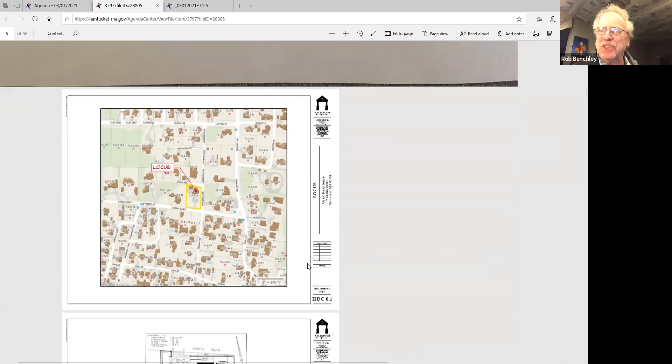And did I see Steve was here? Yes, good morning, Mr. Chair. I am available if anyone has any questions or would like an overview. Thank you. Okay, thank you. Steve, why don't you just do a quick overview? I think most of us have looked at this already, but we'd love to hear what you have to say. Okay, great. Thank you, Rob.

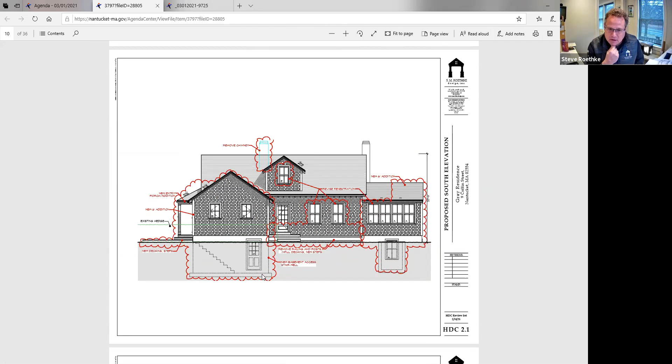Is an area where we're pushing out what's essentially the same mass, but we're bumping it out about 6 feet. And then that mass is going to wrap around the driveway side of the building to create a side entry with a simple and pretty shallow little porch element. If you maybe just scroll down one elevation, Holly, I think—oh, sorry. Yeah, keep going.

We're heading to the west side, that's the side that faces onto the parking area, which is just in front of that little garage cottage that also sits on the property.

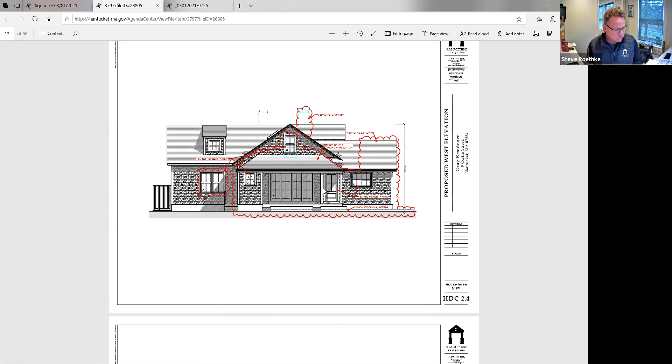So you can see that porch element that we've added there. And on the large format layouts, we also show the existing conditions, which might be helpful for you guys to compare what's existing versus what we've proposed.

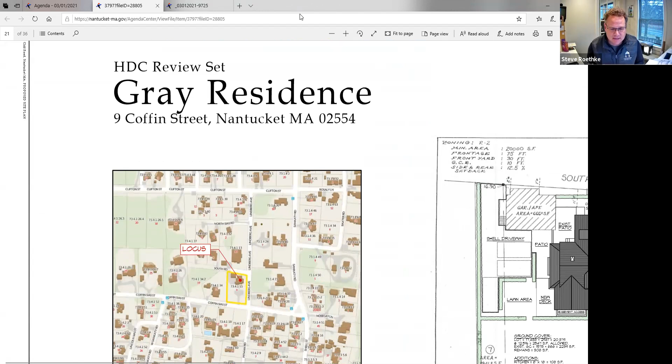On the opposite side of the house, on the east elevation, there's currently a sunroom, and we're extending that sunroom. It's the exact same massing, but we're extruding that out about 6 feet. In addition, Mr. Chair, we're replacing doors and windows as shown on the plans around the building.

Great, thank you very much. Maybe just one last comment I should have said, which is that the original structure has a lot of classic

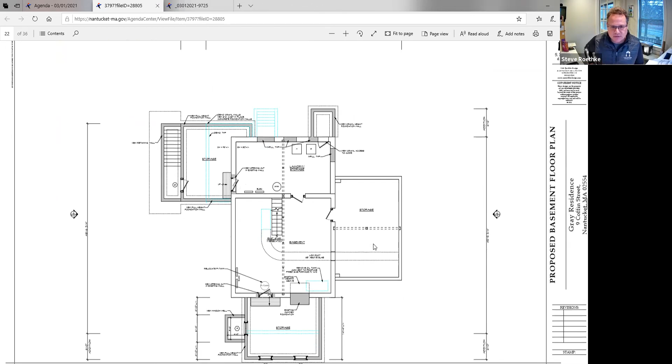sort of bungalow type details, exposed rafter tails, deeper overhangs. What we've elected to do on these two additions is match the similar simpler styling of exterior trim details that we found on those elements today, and let the main part of the structure and its trim details still read as the original building. That was a design decision that we made.

Terrific, thank you. Steve, I wanted to ask you a question. It's okay, Mr. Chair, go ahead.

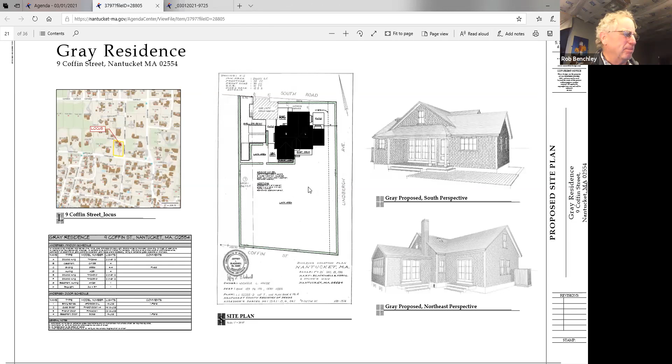On the site plan, it's really hard, maybe I'm the only one, to discern where the actual proposed addition is in relationship to the existing structure. Can you zoom in there at all, Holly? Yep, absolutely. Aha, that's why.

I agree it probably would have been helpful if we bubbled this in the site plan for you all. But maybe, Holly, you can help me walk through this. Let's start with the easy one. Over up against Lindbergh is that first roof line that you see all the way to the far right there, right below.

Okay, so that's the sunroom or east side. And then if you go to the opposite side, Holly, everything in the middle there is existing massing. That entire piece there all exists. That dormer that you see, the massing that those two skylights sit in, one of those skylights is existing.

I've actually proposed the second one. But everything to the left of that, where your cursor is now, and then down to that front forward facing gable, is the renovation on that side of the house.

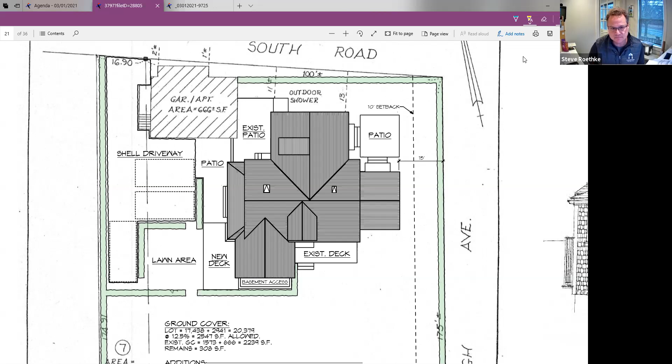Makes more sense, thank you for that. And I'll remember, once this gets proposed before the HDC, to zoom in for them.

I'll invite anybody to shout out. It looks very sensible to me. Yeah, this is Clement, I don't have any concerns really. And it's two doors across, basically across the street from me.

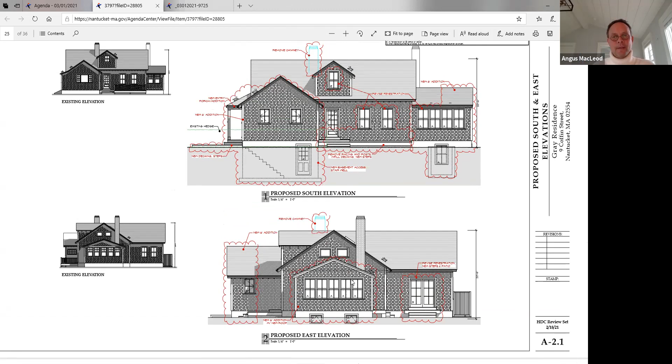This is Angus, oh yeah. Oh sorry, I didn't mean to interrupt. Caroline, was that you? No, go ahead, go ahead. Hi Steve, how are you, Angus? Hi, thank you, I'm good. It's good to see you.

Thanks for the description, and it really does feel like bungalow. I kind of prefer the charm of the 6/1s. I kind of wish that all of the 2/2s were like that. And so the switching to 2/2s is the whole way with that.

As far as the eave details, I think to make the new additions feel like part of the structure and be integrated, it makes sense for those to have the same eave and overhang details. I think that would make it more harmonious rather than bits and pieces and obvious of what's been added at a later time. That's all, Chair.

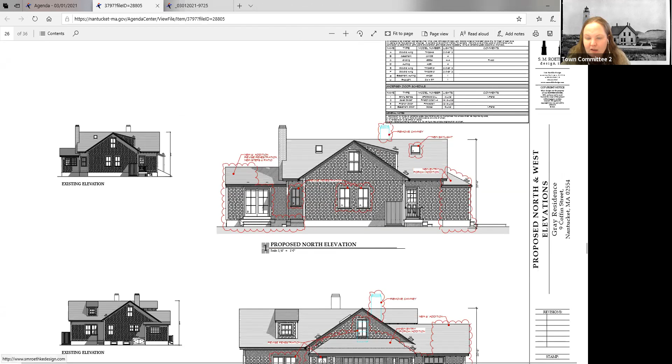Thank you, Angus. Mr. Chair, for the benefit of the board, I did notice there's a removal of a chimney. I know that's been a hot topic with the advisory boards and the HDC, so I just want to point that out. Also, for the record, I found on the NHL data that this one is called Island Home. I don't know why it's not indicated on the HDC survey, but thought you'd like to know in case you didn't.

I didn't, that's where it went. Holly, thank you for mentioning the chimney. I did notice that, but I saw another chimney in there, and I think as long as a chimney remains, it's just weird for a house that was before central heat to not have a chimney. It doesn't look quite right.

Just to clarify, the chimney being removed is actually just the flue for an oil boiler that's going to be removed and replaced with propane. But the chimney that remains actually services a full wood burning fireplace in the living room of the house. Steve, is that the original fireplace? The one we're keeping, Angus, yes. Yep, thank you.

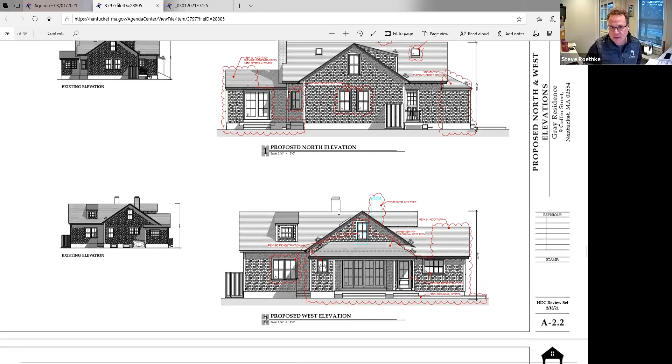Carolyn, I think you wanted to say something. No, I have no comments. Okay, fine, looks fine. I think Angus's comment was good about the windows, but other than that, none. All right.

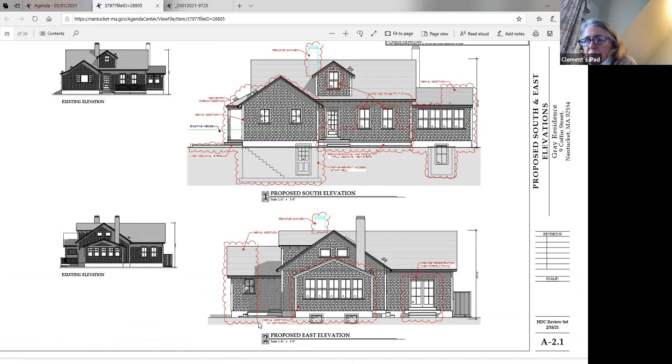Well, if there's no further comment, I think... Holly, did you get it? Yes, she's nodding yes, I did. Thank you, okay. Steve, thanks for being here today. Thanks for you all coming very much. See you, take care. Have a nice day. Stay dry. You too, Gary. Yeah, yeah, looking so healthy.

Okay, we'll move on to 9 Hawks Circle.

Hi, it's Adam Davis with Goldsmith Architects. So Adam, where are the next two items? I was going to mention if we want to go over Canterbury first, or I can just mention that the Canterbury applications are basically the move from 9 Hawk Circle. If you remember the last meeting, we had the existing main house and garage guest house from Hawk Circle, and there was hope that we could save it, and we did save it, and those are moving over to Canterbury. That's the following application. So this first application is for a proposed guest house at 9 Hawks Circle, as we're now working with a clean site.

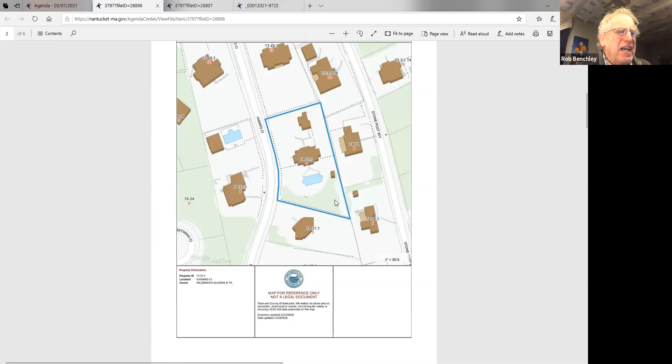And Adam, this is Rob. Am I correct this is pretty much the application you submitted a few weeks ago? Same design, same project. We had submitted on the main house before, to which we've since had your review and the HDC review, and we're resubmitting this week with a revision that's hopefully more in keeping with what everybody is looking for. But the guest house project is designed to fit with the main house as well in terms of style. Great, thank you for that clarification.

Just as a little side note, the chair notes the arrival of Mary Lathrop Will. Thank you for coming in. Sorry to be late. Oh, we'll dole out some punishment after the meeting. All right.

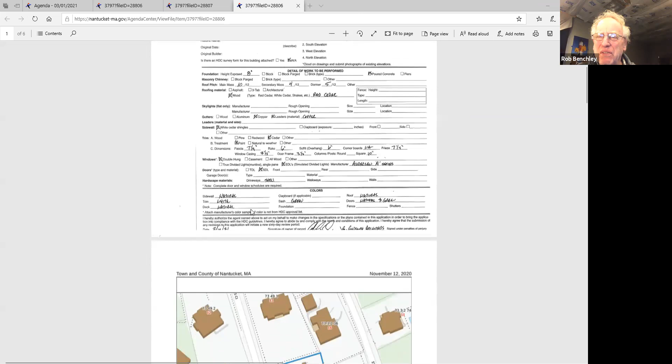Which one do we want to look at first? Do you want to look at the new dwelling? Sure, well since it's up, yes. Get them all out in a row. This is Holly, the guest house application, but I'm fine with starting with this one. As you'll see in the site plan, the red square is marking where we're discussing the guest house.

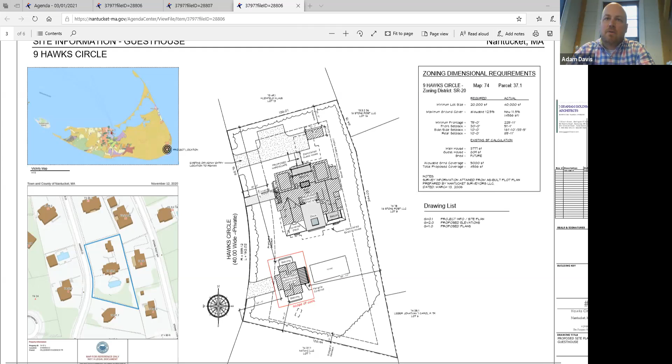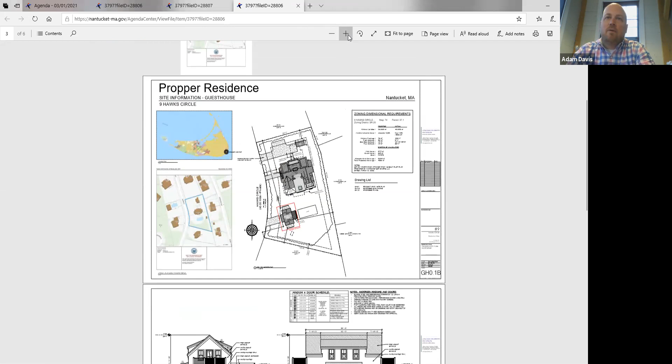The main house has a very similar mass to what we had talked about before, pushed more to the north, where the guest house is essentially meant to mimic one of the wings coming off the south of the main house. It's a simple story-and-a-half structure with shed dormers on either side, as well as porch and balcony on either side, with a pergola facing the pool. For the most part, the property is set three or four lots back from Low Beach Road, so it's not very visible from any public way. From Hawks Circle, there's currently an existing very thick privet hedge along the road that we'd look to maintain or repair if any of it gets damaged.

Mr. Chair, through you, I just wanted to let Adam know, if you're not already aware, that you will need to get approval from the planning board for that second curb cut, for the driveway. Yep.

So again, similar window schedule to the main house. We're doing 2/1 windows, French doors, 2/2. We've got an outdoor shower located on the east side, closer to the pool, and it's very sheltered, being in the backyard of the main house. It's a nice little simple structure, and I think it's working out pretty well as far as scale. The biggest thing here was, on the main house, we had crossbucks for the railing design, and we had some opposition to that. So we switched to a more standard, more traditional railing design here, which will reflect in our revised drawing of the main house.

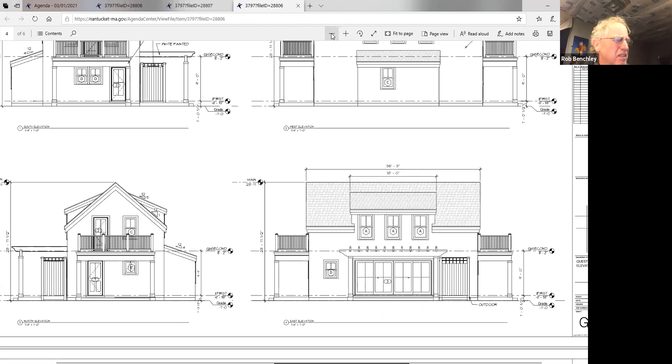So it's the east elevation that we see from the street, is that correct? You would see the west elevation. West elevation, okay, so that's not necessarily the front of the house. You would just see the shed dormer with the three windows and the small shed addition off the side. And the north elevation is presumably the entry.

Yeah, that is one massive hedge around that property. It really is.

It's thickly planted to the north, and then on the south it's all lower. But the owner is very interested in keeping that backyard as private as possible, so we'll keep it well planted out.

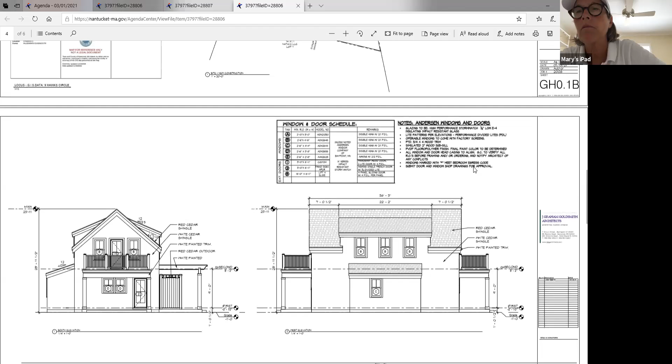The pool shown on the plan is in the same location as the existing pool, and we've reached out to a couple of contractors to discuss the viability of renovating the existing pool. The shape of the existing pool is a little dated, and none of us, or the client, are all that excited about the rounded sides to it. So we're seeing if it's possible with a gunite pool to lop off the semicircles off the sides and start fresh with a box. Essentially, if we can infill the east and west ends of that pool, we could likely maintain what's there.

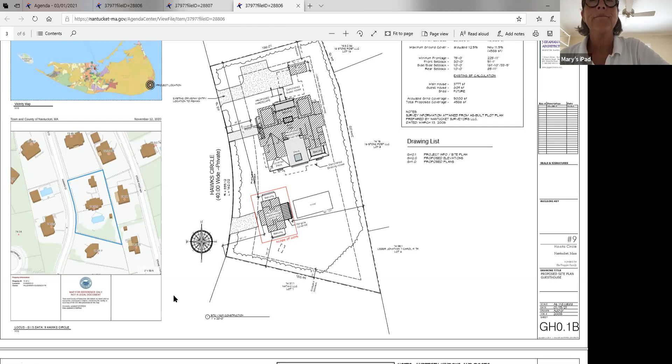Thank you, yeah. That's a valiant idea. I'm not totally sure that it's that viable, but we're giving it a shot. Understood.

Chair, I'm happy to start. Go ahead, it's Angus. So I just put in the chat, I would prefer to see the main structure before deciding on the guest house. But if we're going to go ahead and review it, with this being more than just a barn or some sort of storage.

I think that there needs to be some acknowledgement towards the street and the approach, and the driveway going up to a blank wall as opposed to an entrance. That seems awkward. It's like the front of a house, but you're looking at the back of the house.

Okay, and again, I'd like to reflect on the fenestration and the railings and the massing and the roof lines and all of that with the main house. But Adam, I appreciate you talking about the railings and the fenestration. It would just be nice to have a picture in front of us.

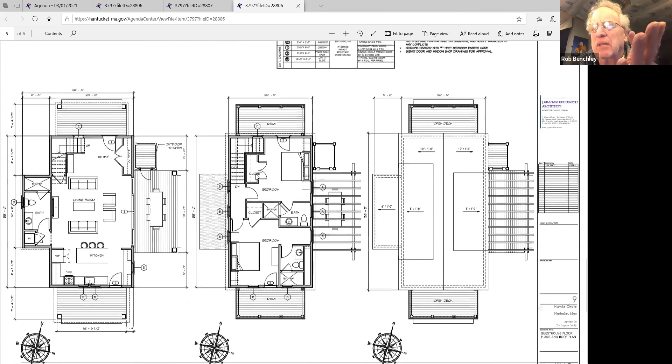Yeah, and this is Rob, just for the record, Angus had put up a question in the chat about having this track with the main house application. Just so that's noted.

Yes, Mr. Chair, that's typically how these work. I'd have to talk with Kathy on how, because this one's a newer application, the other one's actually going to be an old application. But typically that's how the HDC likes that, to have them track together.

Yeah, and given the length of the HDC agenda at this point, it wouldn't surprise me if we're able to tag these up together once we submit our revisions for the main house. You're probably right on that one. Yes, the length of them. But yes, I have notated that on my notes to have a track.

Mr. Chair, if I could ask this, I'm curious, Adam, on the length of these decks, second story decks. There doesn't seem to be indicated. I want to look at that. But I do agree with Angus, this approach facing the street, that's not typical.

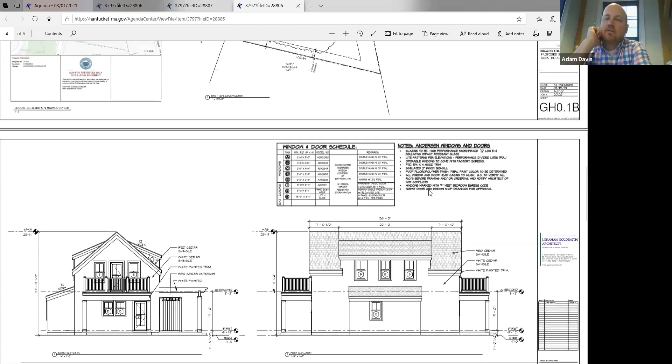And now, in this location is not where that existing hedge is going to be kept. That's a little odd. If it was actually going to be blocked, then I don't think we would typically have that conversation. So, I can speak to that a little bit in the sense where that secondary driveway is certainly just meant more out of convenience than anything.

And I guess I should show some planting, because I believe the idea is that we will plant out this secondary driveway so that you're still not seeing the house necessarily. So if you imagine right where your arrow is would likely be a gate to walk over towards the front, and then the back of the house, the west elevation, would be planted out.

Okay, and that's where we can play with that driveway design. This was put in based on knowing we want the ability to pull something in over there. The other alternative would be not a real driveway, but just the ability to drive once you cross the hedge over towards the guest house. But this might be easier as a secondary access, and frankly, maybe good for maintenance folks to park there.

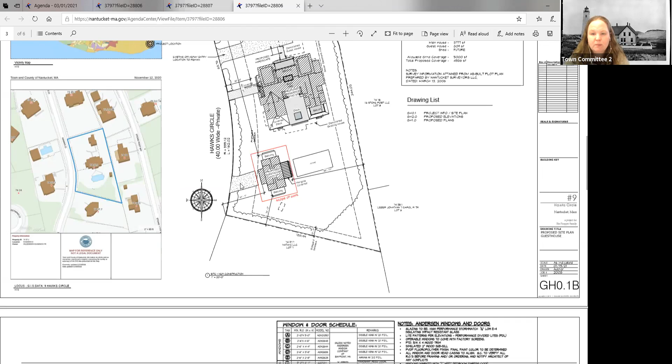Okay, if the intention is to block the visibility from the road to the guest house, that's going to be a concern with this. Yeah, we could show that elevation planted out to show kind of where we would imagine hedgerows to be.

So again, it's a secondary structure. We don't want it to be the first thing you see as far as pulling up. So imagine a thick privet hedge going around the back of that as well. We'd throw a driveway in there to pull into, but you'd go through a gate on the north side to walk over to the front. Anything you can do to propose that information now would probably be best.

Holly, in the floor plan, the depth of the deck is noted as 7'4". I believe the max is 8, I believe. That sounds familiar.

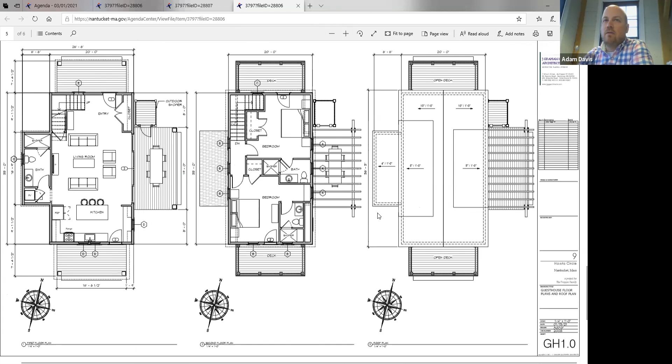Typically, we'd hide the railing a little bit more with a hip roof on this type of structure. This is going off criticism from the main house, where they weren't happy seeing the hip roofs as they were -- it was just another language added to an already fairly complex house. So they felt if we could simplify that, which we did, that's why the porch might read as a little larger, but we could certainly shrink it down a bit too.

Great, okay, any other comments from my fellow Sconset Advisory Board members?

Rob, this is Clement. The only comment I have is the reason I think those porches look so large is because of the size of the house. So maybe if they could get shrunk a little bit -- you know, they're kind of like bookends, but they're very heavy bookends. That's it. Okay, yeah, thank you.

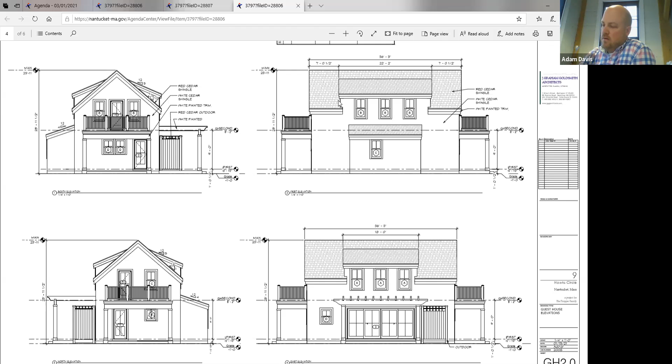Yeah, I don't know at what point the HDC stopped discouraging freestanding second floor decks. It used to be something you just couldn't have -- it needed to be incorporated between extending walls so it was sort of nestled in. And this, both are clearly visible from the road coming and going, so I guess they've changed their parameters.

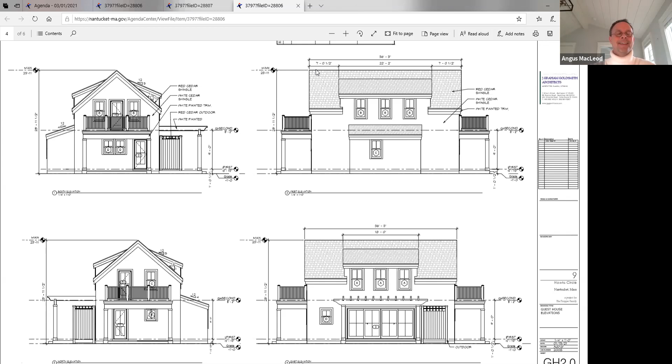Thank you, Angus, for that. Angus with the memory. Thank you. It's only been 35 years of going to these meetings.

Agreed, this is Clement again. Am I correct reading the height as 29'11", or is it 23'11"? Yeah, okay, that's better. Thanks, Holly, for enlarging.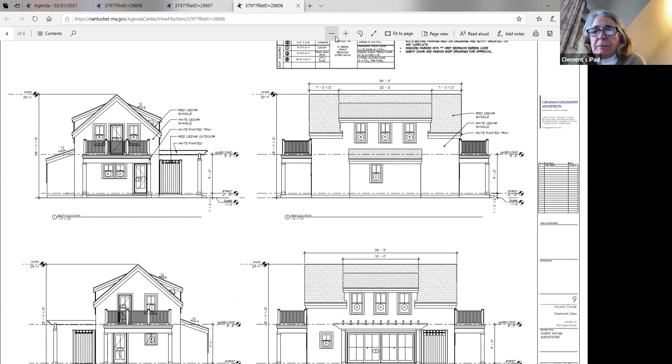I'm thinking back to those early Tom Nevers upside down houses from the 70s and 80s with 22-foot tall 4x4 posts holding up the second floor decks. Yeah, terrible.

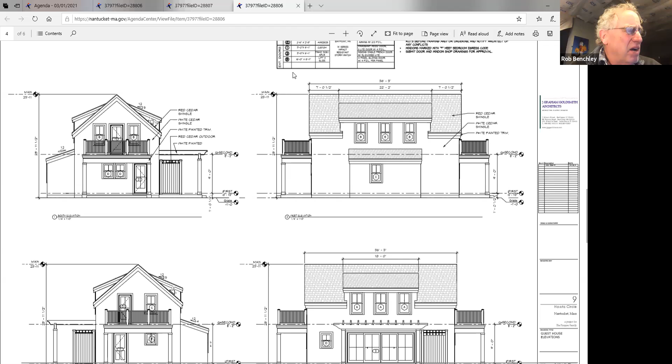All right, then. I think we're good with this one, and we should move on, I guess, to the relocation of the existing house.

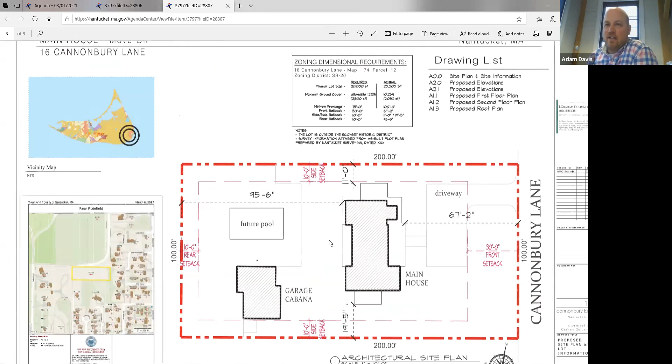Yep, and just as Holly's pulling that up, I will say, thankful for due diligence, we had a couple of house movers look at the existing house to basically say there's no way this thing's getting out of Sconset without really hacking it up. So some quick action -- there's plenty of available lots over on Cannonbury, so we've got something of a new project happening over there. The movers were pretty excited that this can be picked up in one piece, they don't have to take it apart, so it should be a nice clean move.

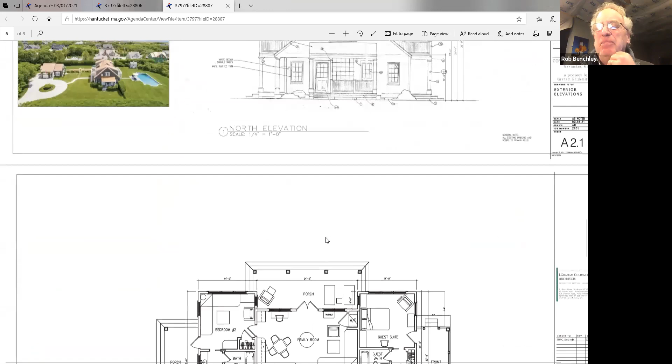Yeah, thank you. It seems like the larger company said okay to making it a new project in that development. That's great. Yep, it fits really well on the site. It's a clean site as far as simplicity and shape.

As far as orientation, you come off the road, we'll keep the driveway to the north because there's already a curb cut there. The house will be somewhat centered but still hugging the north side as much as possible. The garage, which we won't have a driveway going back to, is more meant for the idea that if you have a boat or car you leave in the off season, it can be pulled back there just over the grass. And we'll use the existing finished area off the garage as a cabana for a new pool.

Mr. Chair, if I could just ask one question. I'm a little confused as far as this locus map, because that's Plainfield. But this is going to be Cannonbury. Oh, I'm terribly sorry. Something must have happened with our reference. That is the wrong map.

If you wouldn't mind emailing me one, I can put it within this PDF for whenever it goes back. But yeah, that's definitely gonna cause some concern. Yes, I'm terribly sorry about that.

I'll also ask, how do you get to this, and where's the road on the site plan? That's a project we developed a couple of years ago, which was the exact question before, but it's all done now. Okay, so I'll send you a new site plan.

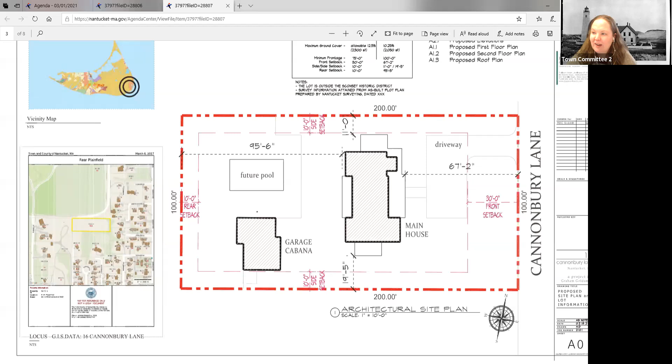Okay, thank you. Would you like me to email you the GIS right now? If you wouldn't mind, that way I wouldn't forget. You're gonna have to move a heck of a house out of the way first to get that house on the lot on that site plan. They won't be happy about that.

Thankfully, it's all quite open and clear to get there. Yeah, Cannonbury is just relatively underdeveloped at this point, so this will fit nicely. Very developed. And it won't be on the landfill. That's really great.

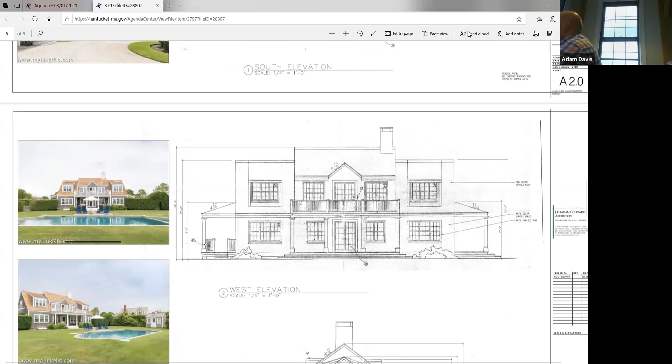Okay, so Holly, I just sent you the new GIS map, and I'll send a new site plan cover sheet for that. Thank you for that. No, sorry for the confusion. That's okay.

Since there's no proposed changes within the move, no concerns. Okay, and then the garage, let's put that one up too. My only concern is the orientation facing the street, the east elevation.

Are those French doors that'd be the new front door? No, the street, it's a single door in the front. Well, they are French doors, yes.

Well, I guess because on the old plan, those were facing the pools. So that was not the... it's like this: the street elevation is the side porch, which is a single door. But the north and south elevation both have French doors. One was from the parking area, the other was to the pool. But yes, that's basically the street elevation, that's the street north.

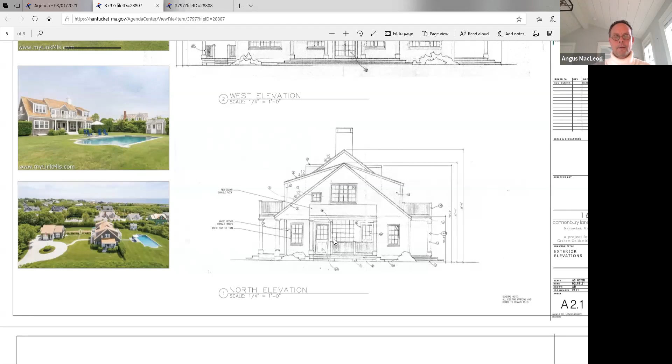From 9 Hawk Circle, I guess that should be labeled east then if it's facing the street, right? Oh, no, because in the new configuration, that will now be facing north. So the gable ends are facing north and south. The east elevation is the new front elevation, which is what used to be facing the driveway at 9 Hawks.

Okay, so there are French doors facing the street now. Correct. And the second story deck is freestanding. Certainly something we could swap the front door out. Yeah, that would be nice. I would take a look at the second story freestanding deck too.

I did do a little research as far as neighboring houses in the area. And while I guess the difference is a freestanding deck versus one that's embedded into a hip roof, there are several properties that do have balconies over their front door, on the front of the house.

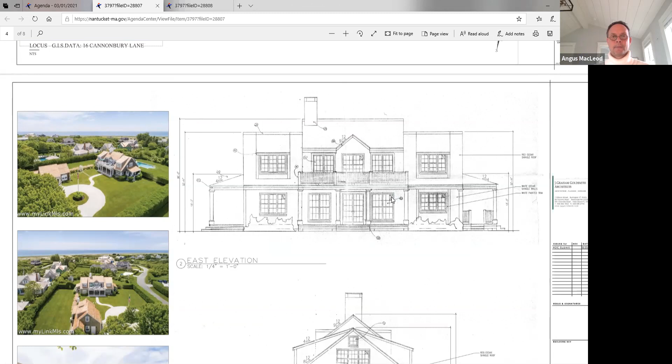Yeah, I don't know how or why these are getting through, but do it while you can, I guess. Oh, I see.

Could we see the west elevation quickly? There you go. Yeah, so the east and west really match one another. It's funny, I've been to that house a number of times. I never noticed that their front door was a French door.

Peculiar. I think that works better when the gable faces the street and you sort of go down a driveway and then look at the front of the house. But with it facing the street, I think there's a different dynamic that needs to be examined more closely. This is a situation where it'd be very simple to swap that French door out for a single door with side lights, and it really wouldn't have much effect on the shingling or trim.

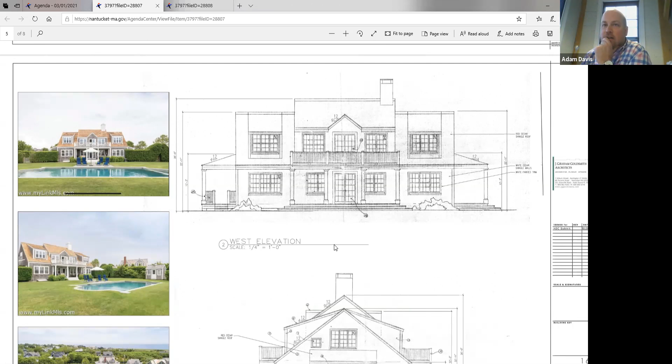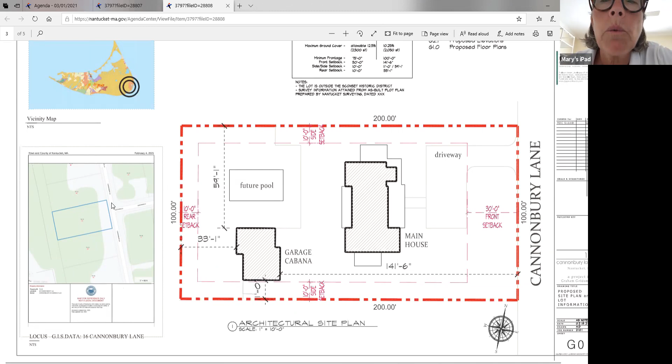We're going to move on to the garage now, and I note that there's the proper site plan on the left for everybody's information. So it's right off, it's right opposite what, Sleepy Wing Circle? Yeah, I think so. Yes, Mary, you're correct. Okay.

Yeah, that's the first cul-de-sac off of Cannonbury. So the east is facing the street? It's not nose out.

These elevations are confusing in the sense of where the house used to face and where it does now. I think the front door faces north. When it's on Cannonbury, it would be north facing. The existing, from Hawk Circle, the garage door slash front door was facing west, but we're turning it 180 degrees on this one, because this was a 90-degree turn from the main house at 9 Hawks, but we're aligning it with the house over on Cannonbury.

So the east would be the front. Makes sense, Adam. So there isn't a driveway that goes to those garage doors? There will not be, no, it'll just be grass. Good. That's weird.

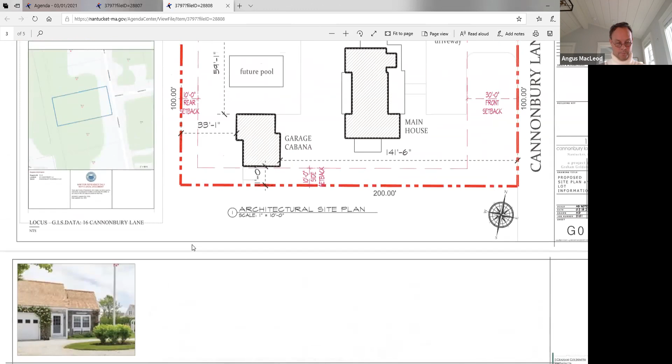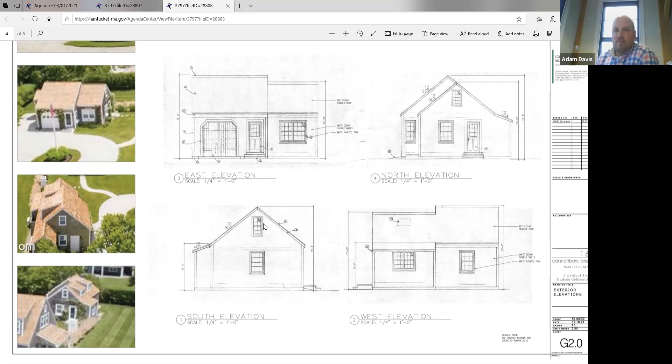Well, I'm glad you found a home for them. Any other comments on this? I think it's terrific that it's been reused, it's great. I'm glad to find a spot nearby. I'm surprised they didn't just start with a bare lot. Exactly, that's a whole other conversation. I'm sure it is, and I'm glad you didn't try to move it to Codfish Park.

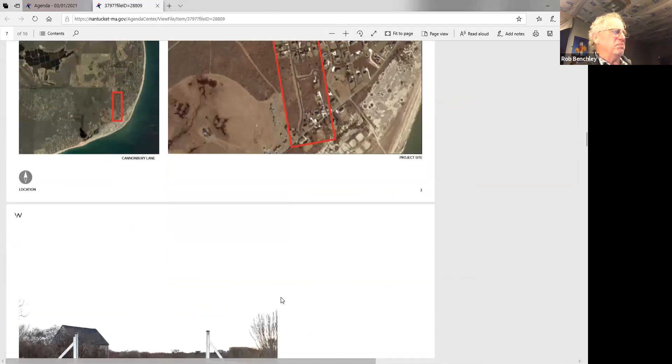Oh, this is the same neighborhood, is it not? It is, down at the end on the right. Well, this really makes you appreciate the previous submission.

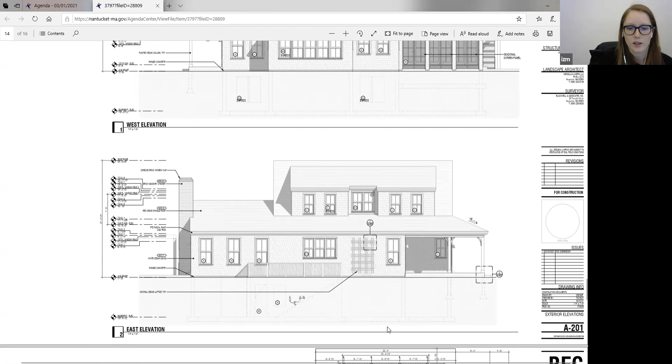The idea was to do a low slung roof, really kind of like a bungalow style, and that's how we ended up with that back portion, doing these long, low slung dormers, trying to be mindful of the culture in Sconset with our porches and articulation around the columns. And yeah, we would love to hear your comments.

My copy of this on my other computer is jumping around. Is this a modular? No, it is not. Okay, thank you.

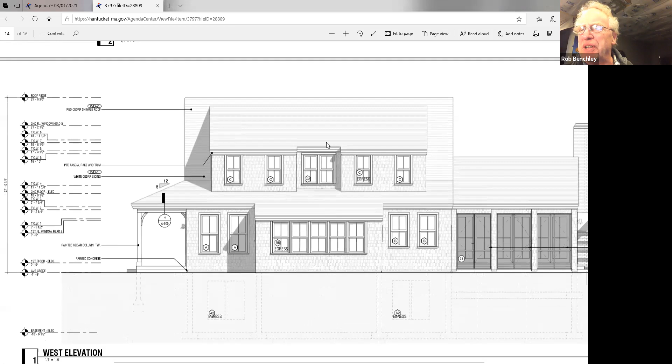And on the west, I'm sorry, hang on. Ugh, that right there, that screen, that's a screened in. Correct, yep, that is a porch, screen over porch on at the back. A fly trap, as my grandfather used to call it. Keeps the flies in, yep.

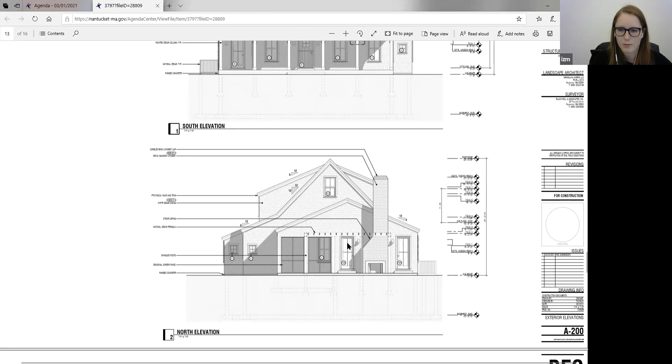Chair, this is Angus. I'm a little confused because the locus plan shows this on the southeast corner of the circle at the end of Canterbury, which would mean that the front of the house is north facing the street, yet I think the back north elevation is marked as the back of the house. I apologize, you're correct. The front elevation is incorrectly marked as south, but that is actually on the north face, and below where it says north would alternatively be on the south. I think that'd be helpful for everybody for that to switch.

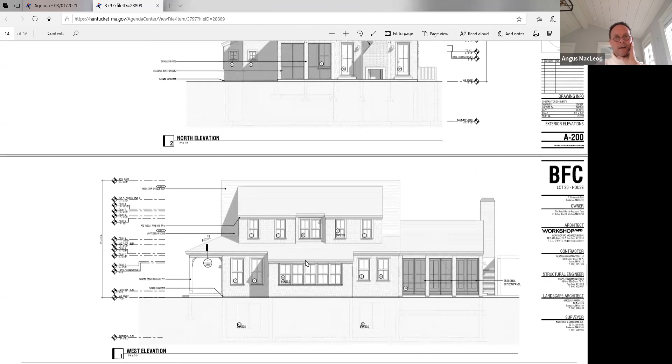Yep, sorry. I love the idea of a bungalow style being introduced really anywhere. It's just a more modest style. Roof lines are shallower, so the 12/12 would be more Victorian, and the brackets and the posts are sort of more like carpenter Gothic, and the windows are more Victorian, long 2/2s, as opposed to 6/6s that are more squarish, not square, but not as long as that. I think that the proportions of the panes and the windows and the doors are awkwardly long. So that's what I have for now.

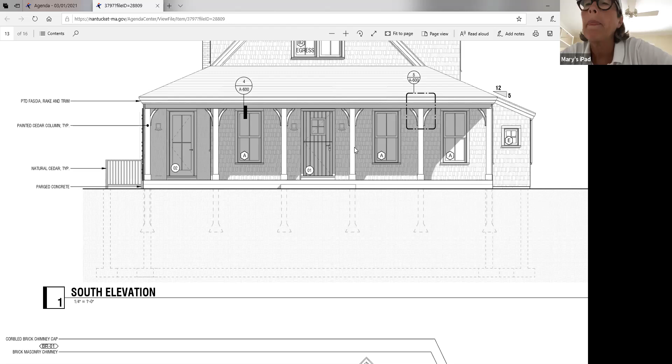Okay, thank you. We can study some of these details. In terms of visibility, really this front view is the main one that'll be visible from Westerwick, but we can continue to study them. You might want to look at a house on the corner of Baxter Road and Rosalie's Lane, on the ocean side, called Blink Bonnie. You might find some inspiration there.

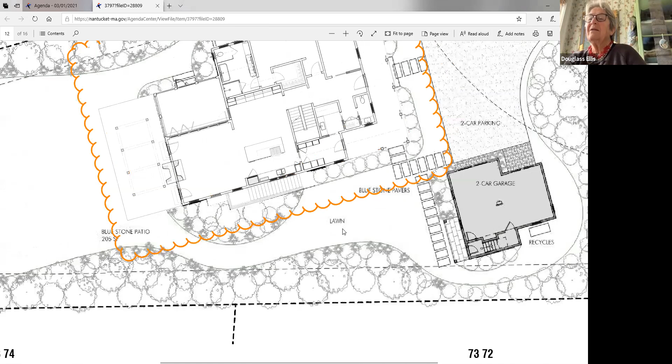One last thing—whenever possible, you want to avoid having two doors on the same plane. That second door is about 10 feet behind, it's set back. It's hard to see the perspective in that view... yeah, that's better, much better. That's very typical, I think, isn't it? Yes, it is.

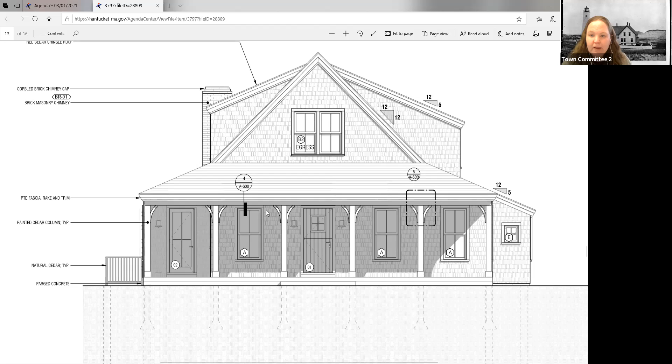I just have one question or comment—I like the chimney, but it seems a little stout in relation to the peak. It's part of the back of the house, which is quite a bit lower, so when you look at it from the front it looks weird, but when it scales back you see it clears the roof line of the back of the house significantly, just not the main roof line—more proportionate on this elevation.

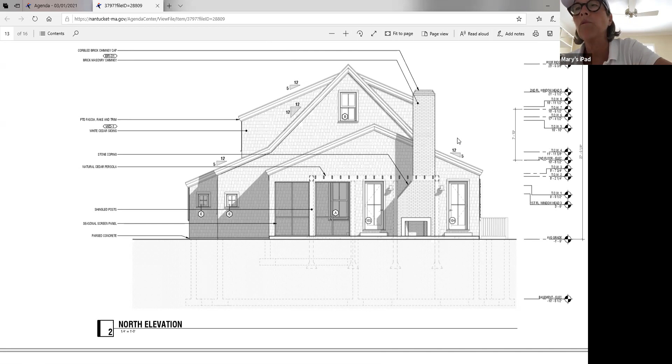As a practical matter, is it going to draft better if it's taller? It would look funnier if it's taller, but I think since it's so far from the other roof, it should draft perfectly well because it's really behind the second structure, the lower roof. We're happy to make that taller if needed. Yeah, it looks fine right there. I don't think you really see it from the front, I don't think your eye will catch it.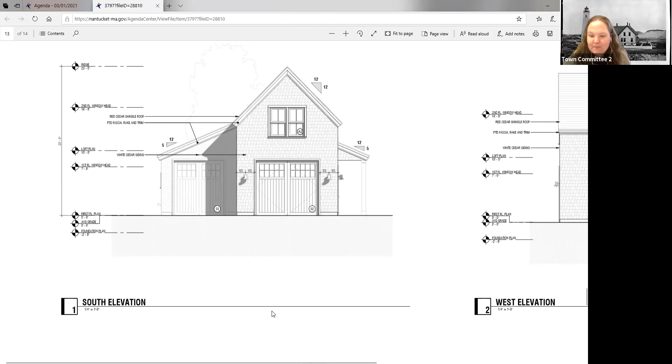How tall is it? I don't have the exact height in front of me, but if you go to that first elevation, it's 23 feet, no brackets. Seems a little tall, and it seems like the roof pitch doesn't track as well with the main house.

I like the garage doors, however, the two sets of garage doors mimic the front door on the main house, which may get changed.

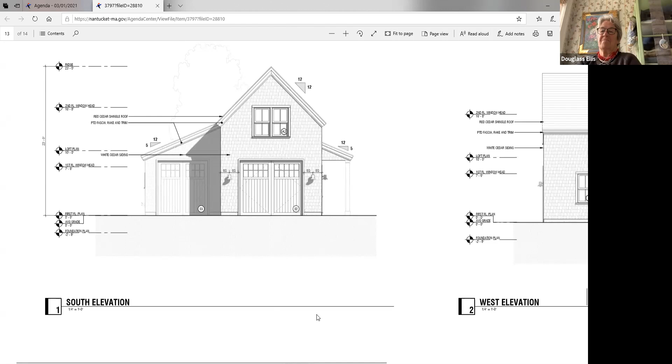I don't mean to be a stickler about direction, but this would be north—there's a facing west, I apologize. Yep, these are also incorrectly labeled. I mean, it is a little bit of a diagonal, but south is more facing the house, I think—yes, to the correct, south.

I like the stepped garage doors. I'd like to see it be a little bit shorter if possible. I like the style and scale of the doors and the lights.

Caroline, would you just add the same trim to those posts that you have on the front of the house, whatever you decide to do? Yes, we can add that column detail there—small, small.

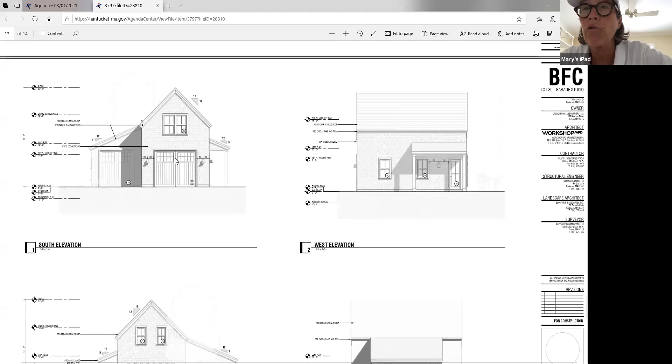So the garage, just to clarify, is what we're going to see from the street. The garage doors are what we're going to see from the street. No, it is actually what is noted as the east elevation with the small window at bottom. That's what I thought, because it's not snout-nosed out, so you actually have to turn in to get to it.

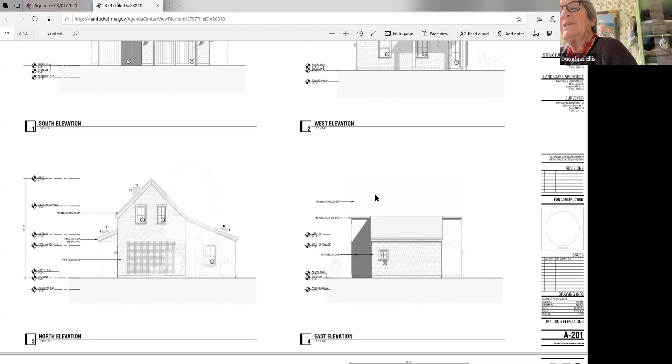I see. You know, this is Caroline. We see this more and more, that houses which I think would be elegant have cars parked in front of them. The new one that was done near the Ruddicks, they spent all that money on that house and they're gonna have cars parked in front of it. I just don't understand.

A garage is a utility thing, it seems to me, and not a thing of beauty. And I think utility buildings were always behind properties. But...

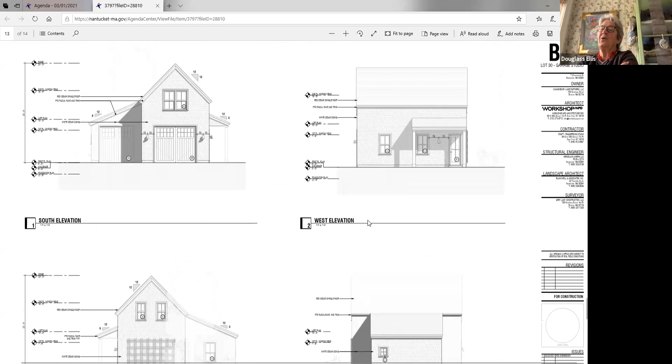So it really won't matter what the front of the house looks like. Well, if they pull their cars in the garage, they won't see them, you wouldn't see it, because they're so huge it'll block the front door. I just think it's too bad to spend all the money on the landscaping and everything, and then you walk through a car park to your front door.

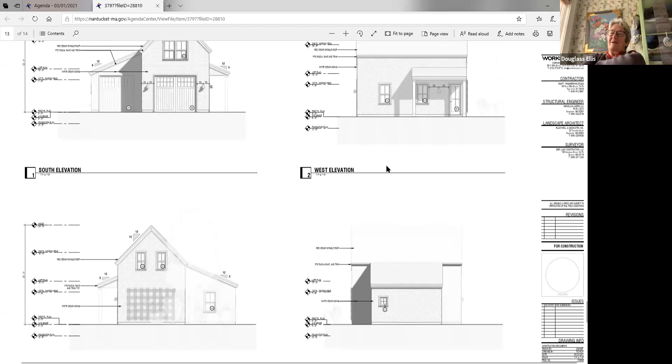So noted. We need a height restriction on cars. Maybe design too, I don't know. Oh, boy. Yeah, that's true.

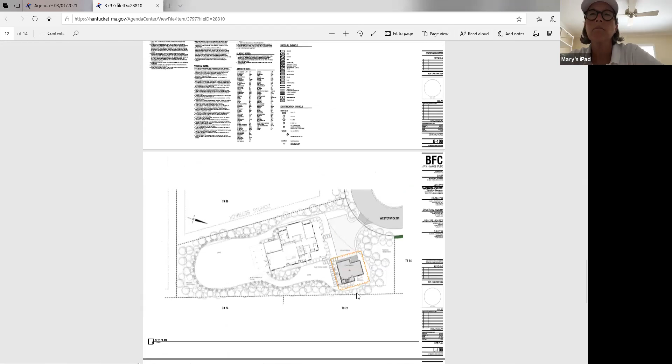Well, that really is the sort of the last lot at the end of the road, isn't it? Actually, the Vales live over to the right where you're looking. Oh, yeah, so the Westerwick goes that way, okay. And it backs up against the Milestone? The old dump, well, it backs up against trust property. That's the old Heller land, right.

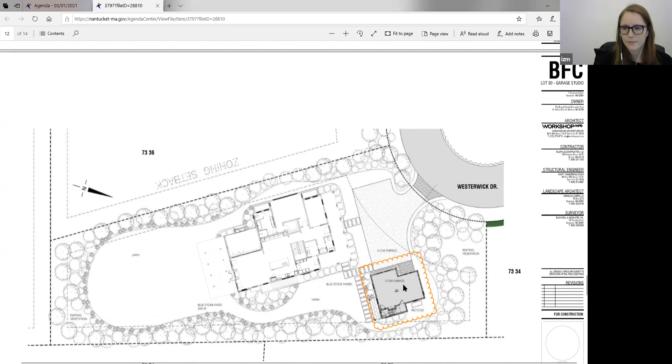Yes, Bluefish Lane, and then the water company to the north. I do think the way it's situated on the lot, going down Westerwick you're gonna have that nice visibility of the front of the garage. It looks like the side I was concerned about with that one little window is gonna be blocked with the vegetation that's gonna be planted, I'm assuming. Yeah, it'll be fun. A pretty lot.

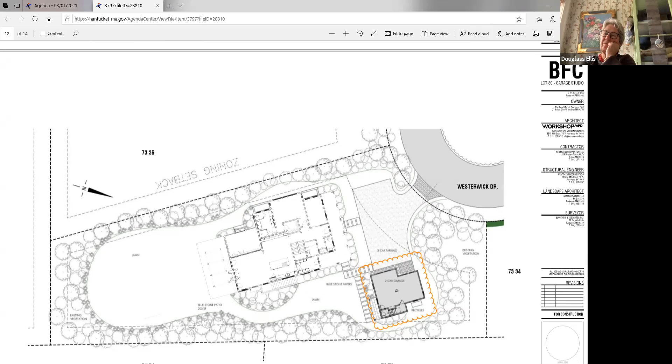Without a pool yet. Yeah, no pool. Okay, are we good on this one? Okay, thank you for your comments. Thank you for coming.

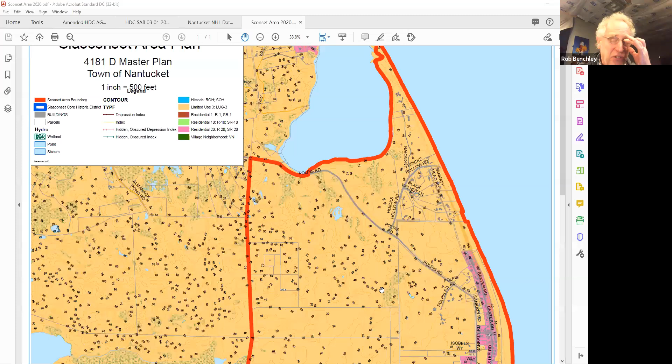Caroline, I have some language that I've drafted for our request to the HDC. If you don't mind, I'll take a minute and a half to read it. I haven't finished it, I didn't finish my homework, but I'm almost done. So I will proceed if that's all right.

Please. This is addressed to Mr. Ray Pohl, Chair, Historic Districts Commission, 2 Fairgrounds. Dear Mr. Pohl, fellow commissioners and HDC staff, as the town of Nantucket is in the process of updating its 41-81D master plan, island neighborhoods and their representatives are now at work offering their ideas in bringing the final plan together through a request from the Nantucket Planning and Economic Development Commission.

This very work is ongoing in Sconset, where many residents, including most of your Sconset Advisory Board, are participating in the process. The geographical basis of these discussions is defined by a map titled Sconset Area Plan, 41-81D Master Plan, Town of Nantucket, which I have attached for your convenience and reference.

In unofficial discussions over the weeks amongst ourselves and with members of the Sconset Civic Association and the Sconset Trust, it is the Sconset Advisory Board's belief that it would serve the community. We wish to expand our review area to coincide with the boundaries as delineated by the attached map.

This is not a request to change or amend any zoning or historic district. It is simply to include Sconset's outer areas as places to see. While this may seem as a considerable expansion to our existing area, Sconset is expanding considerably.